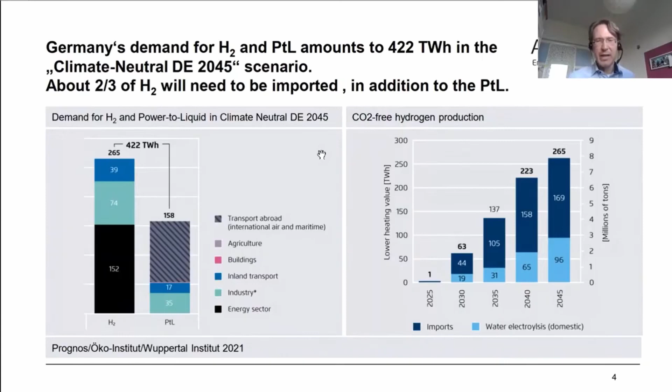For example, low temperature heat is actually needed also in industry, but in particular in large volumes in buildings, individual buildings. We think that's a bad idea to talk about molecules for those applications. Same thing for passenger cars or light-duty vehicles.

Now if we want to move forward with a hydrogen economy, a decarbonized one, we should focus on those parts that are least controversial and uncontroversial. So let's start with industry. It is uncontroversial and very much acknowledged that we need reaction agents and feedstock. And then there's some other stuff in transport, in the power sector, and in buildings.

Now, since industry has a particular challenge because in many respects it is under intense global competition, and we can see global competition gaining speed in Asia, in America, we need to position European industry in a way that it is actually able to compete in the race to net zero. Therefore, we have said we should really focus on the uncontroversial molecules needed in industry first. And that was our starting point to design what we call our no-regret hydrogen project.

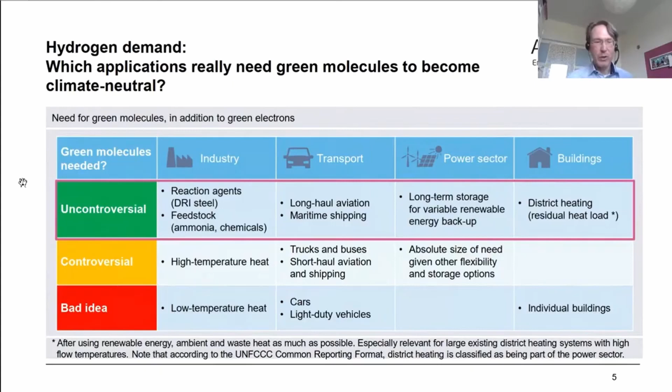I brought you some slides on this today. So we commissioned AFRY Management Consulting to study the underlying question: what's the most cost-effective way to deliver hydrogen to the centers of industrial demand in Europe? So this is the focus. What AFRY did was map industrial demand from steel, ammonia, refineries, and chemical plants, then map supply with the best future levelized cost of clean hydrogen. I'm going to talk a bit more on that.

And then they model least cost delivery systems, which includes storage sites, salt caverns basically—this is all in there. And the result is what we call no-regret pipeline corridors as early opportunities. That is key to understanding this contribution from our side. We don't deliver the big picture for the future of the hydrogen system all across Europe. The question is, where do we start?

Where is the agreement for an early start? And you can find the publication, a data appendix, a slide deck in the webinar if you click on the slides later here.

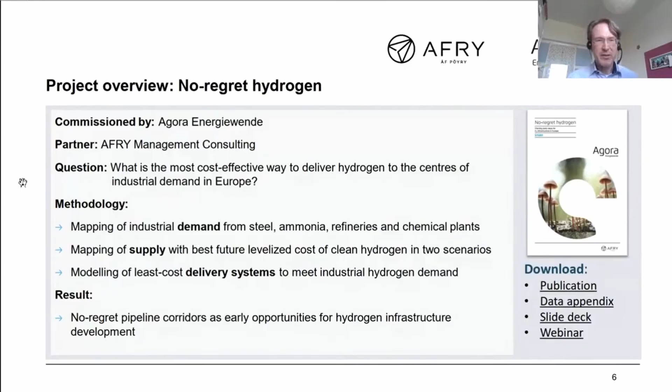There's a phase-in of steel and direct reduced iron steel production, and a phase-out of refineries. That's a strong assumption, I have to admit, but overall the picture is the same. There's a difference in demand by orders of magnitude: below 1 terawatt hour a year, let's say rather in the south, and up to 10 to 30 terawatt hours per year in the north especially—and it's not a surprise—this area between Germany, Belgium, Netherlands, France shows 24 and 27 terawatt hours. Large clusters of chemical installations and steel plants, and of course also some clusters in Eastern Europe and along the Mediterranean.

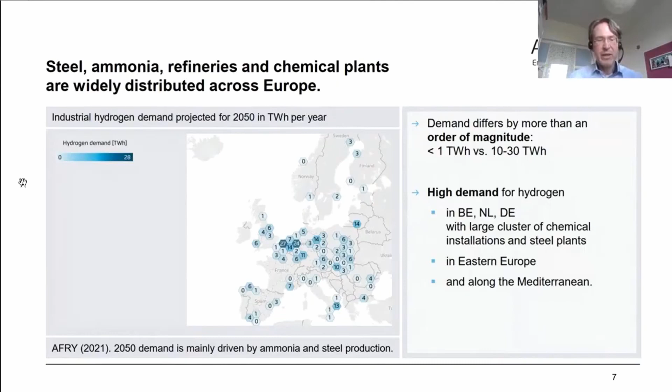Now, this is our starting point. Where is the uncontroversial, no regret industrial demand? And then we mapped potential supply.

We had 2 scenarios in our study. One we call blue-green: renewable hydrogen and hydrogen based on fossil fuels with carbon capture, what we call SMR-CCS. That's only admitted in the Netherlands, Norway, and the UK. Then we have another, fast green scenario. There's no SMR-CCS in there, and there's a very aggressive cost reduction in electrolyzer cost. We think that can actually be defended on the grounds that if the EU succeeds with its very ambitious target of 40 gigawatts of electrolyzer deployment within Europe by 2030, and even more around Europe, then it's okay to make this aggressive cost reduction assumption in the fast green scenario.

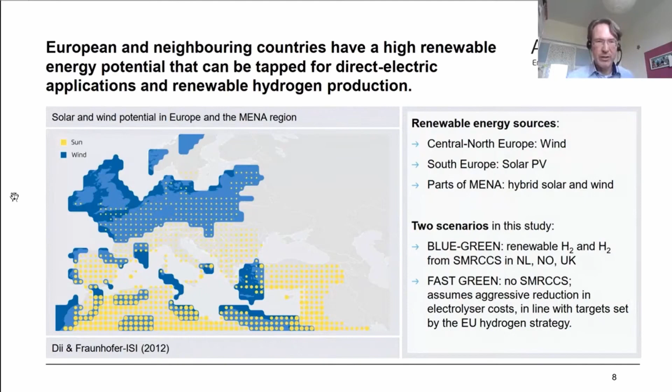However, there is a certain time during which blue hydrogen can contribute to decarbonization and remains a viable investment. The question, of course, is how long it's viable. If you can anticipate that costs for green hydrogen are coming down, do you want to invest today or in the next few years, anticipating stronger and increasing competition from green hydrogen? This is a very important question for anybody doing investments into this, because it may shorten the investment window and the window of opportunity for fossil-based hydrogen with carbon capture.

The key point here is that we will need ambitious policy to drive down the cost of renewable hydrogen, because any kind of cost reduction will not come by itself. What we've learned from solar photovoltaics is that there's a big contribution from just deploying PV and then learning by doing. If we expect countries to deploy electrolyzers, we can also anticipate costs coming down through scaling and learning, but this really needs an incentive to deploy electrolyzers in the first place. That's the entire discussion about how we incentivize green hydrogen, which comes at a cost premium today, so there's a cost gap to be filled and overcome.

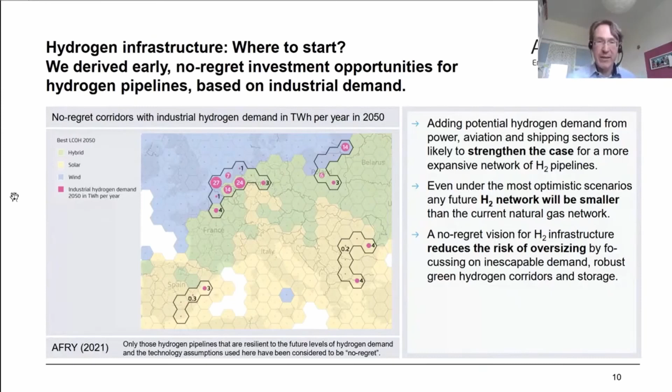And we should be sure that we don't oversize our hydrogen infrastructure based on misleading assumptions, because we should try to electrify first where it's possible. And then when we touch the limits, then we need molecules. And that's what we need to plan for with our infrastructure.

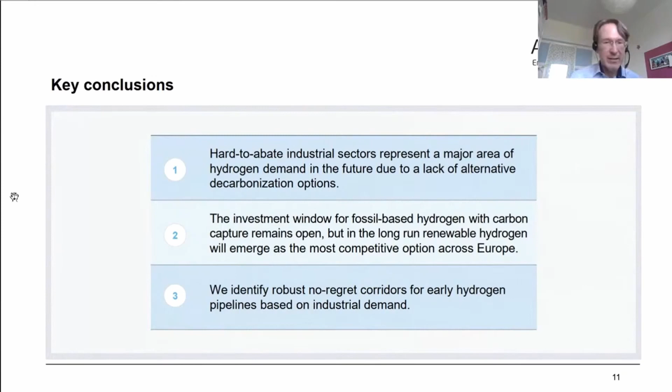So in a nutshell, what some people call hard-to-abate industrial applications and sectors represent a major area of hydrogen demand in the future, because they don't have much alternative or no alternative at all. And there we see an investment window for fossil-based hydrogen with carbon capture. But in the long run, renewable hydrogen will be more cost competitive. And based on this, we have identified our robust no-regret corridors as the starting point for early investment opportunities.

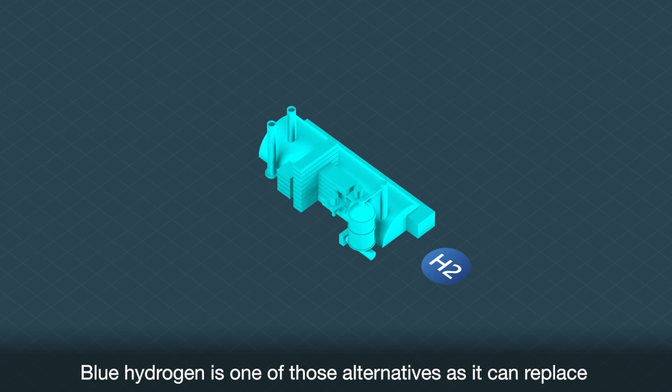Blue hydrogen is one of those alternatives, as it can replace the direct use of carbon-emitting fuels such as coal, oil or natural gas. It is a reliable energy to kickstart decarbonisation, as it is competitively priced for a low-carbon fuel and is continuously available in the large volumes required to support industrial needs. With a production capacity of up to 2,700 megawatts, the H2Morrow project aims to supply blue hydrogen to Germany and the Netherlands starting in 2027.

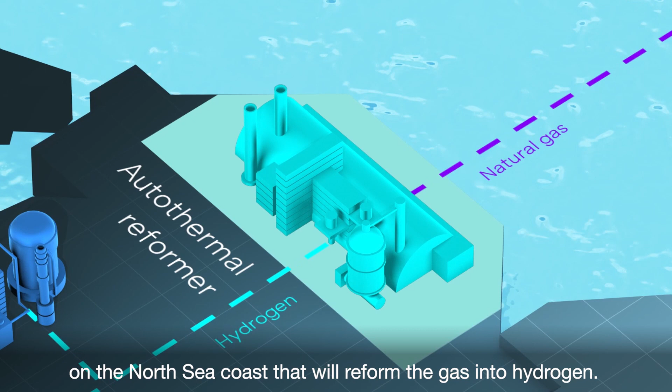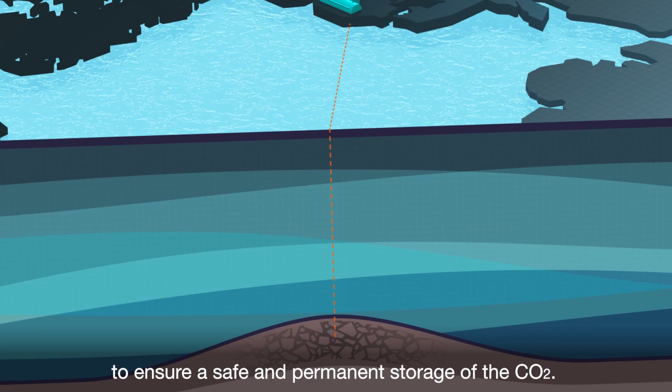For this to happen, natural gas from Norway will be transported via existing pipelines to a hydrogen production site on the North Sea coast that will reform the gas into hydrogen. The carbon footprint of the process will be reduced by 95%, as the CO2 from the reformer will be captured and transported to an offshore reservoir in the North Sea, where it will be stored a few thousand meters below the seabed. This type of storage technology has been in operation for over 20 years, and deposits are closely monitored to ensure safe and permanent storage of the CO2.

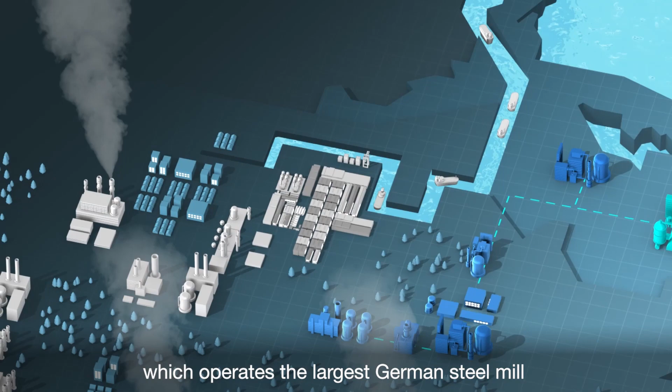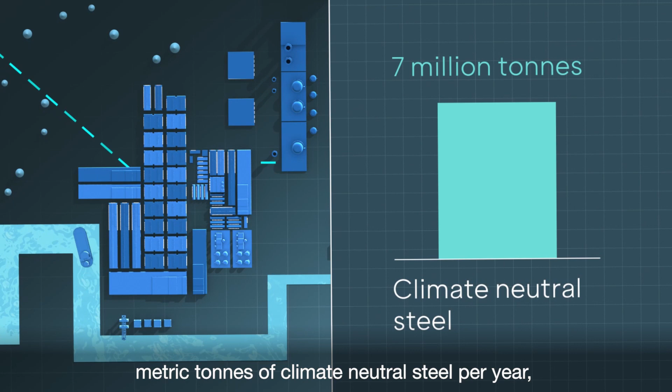From the production site, hydrogen will primarily be distributed via repurposed gas pipelines to industrial partners. The biggest partner is ThyssenKrupp Steel Europe, which operates the largest German steel mill from a site at Duisburg. The project is designed to deliver enough hydrogen to the steel mill to produce up to 7 million metric tons of climate-neutral steel per year, reducing CO2 emissions by up to 11 million tons at the plant, and helping reach the company's climate targets.

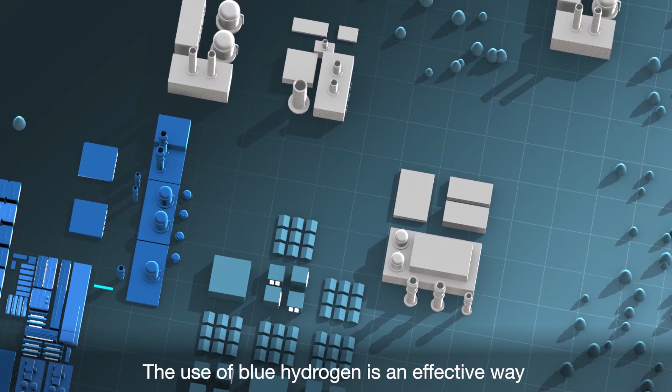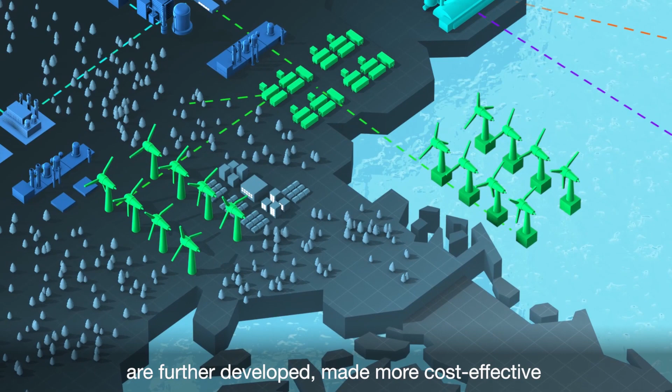The use of blue hydrogen is an effective way to establish hydrogen transport and distribution networks and transition to a clean hydrogen economy. The capturing of CO2 will accelerate the decarbonisation of the industrial sector, whilst technologies for green hydrogen, produced using renewable energy sources, are further developed, made more cost-effective and able to scale to the levels required by heavy industries. The success of the H2Morrow initiative is dependent on effective partnerships with local companies and on appropriate European and national policies and regulatory frameworks, which provide the basis for further investment. This cross-sector collaboration can radically transform centuries-old industries to make them fit for a carbon-neutral economy.

Thank you very much. Very interesting. We will come back to you shortly after the next two presentations for a short discussion round. Next up now is Torstein Melhus, who is Head of Business Development on Hydrogen and Ammonia at Agder Energi. He has more than 20 years of experience from industry, both as site manager, business development manager, chairman, and board member in several companies. Torstein, you will talk about the potential for hydrogen production in southern Norway and the export possibilities to Germany. Welcome, Torstein.

Thank you. Green hydrogen from Norway, I'll talk a bit about that. Equinor is focusing on blue hydrogen and green hydrogen, but I hope I could leave some kind of picture that Norway also represents a large opportunity for export of green hydrogen to Europe. This is Agder Energi in a short picture: about 14 billion in turnover, about 900 employees, 22,000 kilometers of grid, and 49 power stations in the rivers. We have dams, grid, and end customers. And our DNA is electrons, but we think our DNA would also be suitable to produce molecules from our hydropower.

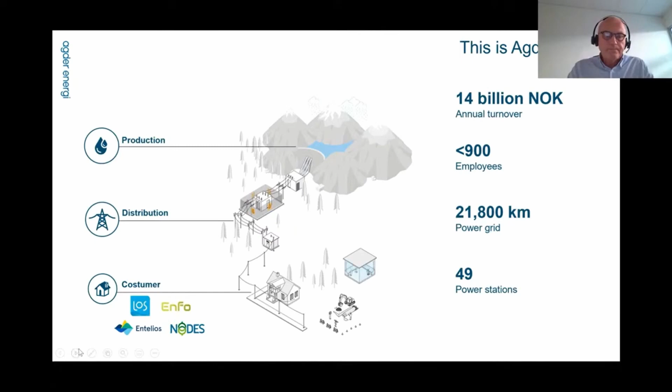Agder Energi is located on the south coast of Norway, closest to Europe of our regions. We have a surplus of renewable power in the region, hydropower. We have a strong grid, closeness to Europe, and we have good harbor facilities. So we have some prerequisites that should favor us for production, and it's not in any way talking down other areas of Norway. And we have available low-cost renewable hydropower.

That's a cost enabler for producing hydrogen. And we could utilize that to produce molecules, as said. And critical here and important is that the hydropower is available 8,760 hours a year. The best wind estimates are approximately 4,000 hours, meaning that we could double the amount of kilos delivered by installed megawatts or effect. We think this is a very important issue here.

We have access to the power grid, high available capacity. We have long-term PPAs at competitive price levels for the power. We have available areas for production facilities nearby harbors, and we have a short distance to Germany and Europe. And we are working on a possible scaling plan to establish a 120 megawatt facility in 2025, currently working on the feasibility studies, and increase that in steps toward a gigawatt in 2030, meaning it would be a substantial production and supply unit.

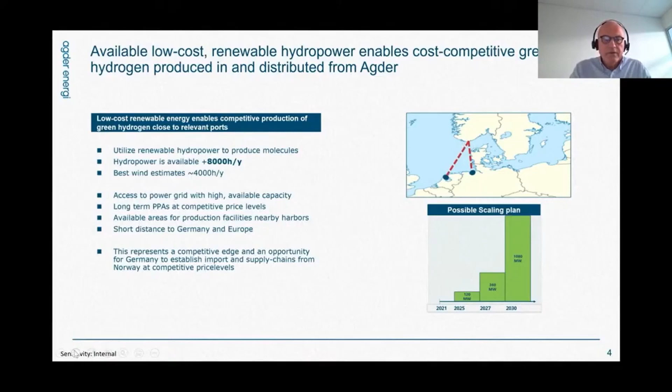We have to transport the hydrogen to Europe, and as the former slide showed, it's a close distance. Equinor is working on pipelines from the west coast for blue hydrogen. There's still no availability of pipelines for green hydrogen from our region. Probably there will be in the future, but in the short term, we see that we have to transform the hydrogen to liquid ammonia for transport and available shipping routes to Europe. This is similar to what they are doing in Australia, Chile, Africa, other continents; liquid ammonia is a commodity. There are available ships to transport it.

And another issue with transforming the hydrogen to ammonia is that ammonia is a bet as ship fuel in traditional combustion engines, both two-stroke and four-stroke. And engine producers are now working to bring forward machinery, propulsion machinery, and utility gensets for ammonia. We are working very closely with different engine producers, and we think this is a prosperous and enormous market when you have also solved the security issues with ammonia. And then also liquid ammonia for storage and transportation.

Transforming the hydrogen to ammonia, storing it on shore at the harbor, getting it on a ship, and sending it to Europe, we think is today the cheapest and most available way to transport it. The obstacle is that it needs to be cracked from ammonia in port or at the end customer, which takes local electricity, which needs to be green electricity, and it's not a good solution to use local electricity. But we think anyway it's the best.

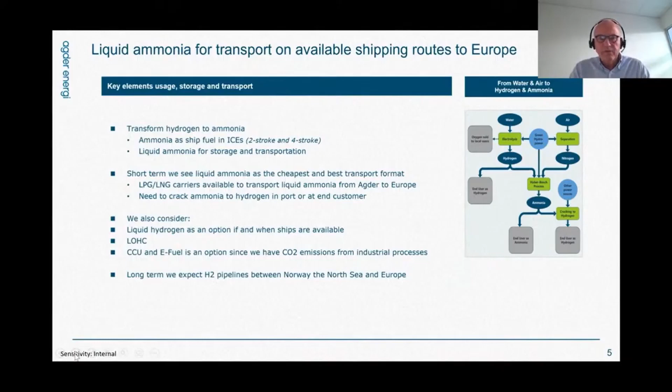But liquid hydrogen is an option when ships are available. Currently, there's only one ship. We hope that liquid hydrogen ships will come forward. We also have been looking into LOHC, which I think is Hydrogenious coming after me now. That is definitely a genius solution, which we are looking into. And also we could have carbon capture and produce e-fuel. We have emissions from industrial processes. And long term, we expect H2 pipelines between Norway, the North Sea and Europe, and that will dramatically reduce the cost of transport.

So, key takeaways. The most important issue, I think, is that we are able to produce 8,000 hours a year, at least, which will maximize the yearly tons. We have fairly priced long-term PPAs. We are able to perform rapid deployment with hydropower in place. We don't have to build anything. The grid is there, the hydropower is there, the locations are there. We are good to go. There are available ships and sailing routes for liquid ammonia with short distances to Germany.

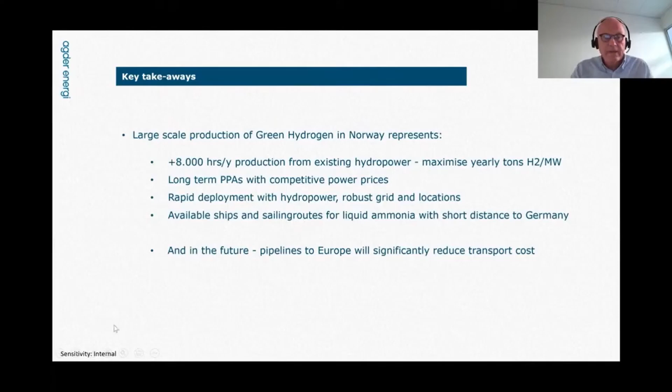So, just to close this, we want to start production of green hydrogen and ammonia in Norway from hydropower. There are available ships to ship it to Germany. And what we hope is that the reception and incoming logistics in European harbors are available so that when the ships come, Europe and Germany are prepared to receive the ammonia, crack it, store it, and distribute it further into Germany. I think the easy part here is the production side. What I have discovered in meetings with German companies is that the incoming logistics are still not available.

So what we'd like to do is to participate in cross-border pilot projects to speed up supplies of green hydrogen from Norway to Germany. And we see that Norway represents an opportunity for Germany to establish import lines for green hydrogen. As said, you don't have to wait for anything to be built. The power is in place, the grid is in place, it's ready to go. So I hope we will get into more and good cooperation with German actors and harbors and parties.

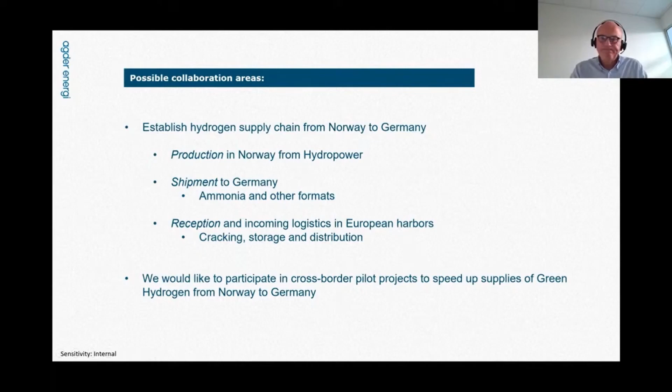Thanks a lot, Torstein. And we move on to our third speaker in this session. That is provided by Ms. Siying Huang, who is Senior Business Development Manager at Hydrogenious LOHC Technologies. Ms. Huang joined the company in 2018 and is focusing on project development in the European and Asian markets. And she'll tell us more about their solution for transport of hydrogen, both at scale and over long distances.

So Ms. Huang, are you there? Yes, hello. So let me try to share my screen now. So thank you for waiting, and thank you for having me here today.

My name is Siying Huang. I'm working at Hydrogenious LOHC Technologies. So as you can already read from the name of the company, we are really focused on the commercialization and product development of the LOHC technologies. And you can see an overview about our company. The company was established in 2013, so about 8 years ago, by our CEO and his 3 professors at the University Erlangen-Nuremberg. And by today, we have more than 100 employees already, and have filed more than 40 patent families worldwide in the field of LOHC technologies.

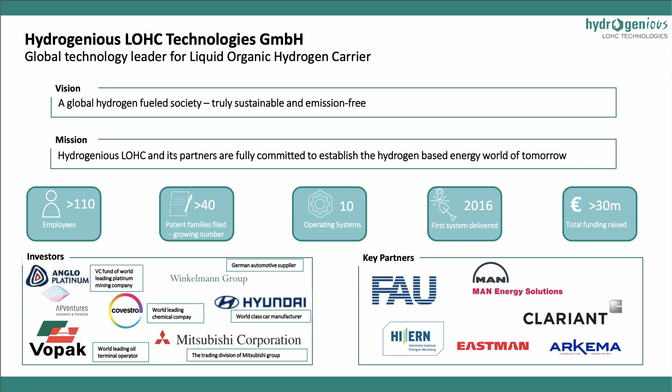And we have managed to demonstrate and to prove that the LOHC technology works in the last few years by implementing about 10 small-scale systems. And today we are working on the large-scale, industrial-scale systems. So I will come to that later. And on the bottom of the slide, on the left side, you can see that we have different shareholders to support us to promote the technology. And we have on the right side different technology partners who are developing together with us different components and making technology improvements for the LOHC applications.

Here you can see how the LOHC technology works. The technology itself is based on 2 chemical processes. The first one is called hydrogenation. So once the hydrogen is produced, whether coming out from a steam reformer or from electrolysis, it can be put into our storage unit, in which the hydrogenation process takes place. After the process, we combine the hydrogen molecules with the molecules of the carrier. And what we get as product is the loaded LOHC carrier. And the loaded carriers can be transported by truck, by train, by ships to different hydrogen off-takers.

And at the off-taker side, we have our second system, where the dehydrogenation process takes place. After this process, we separate the hydrogen molecules from the molecules of the carrier, and the hydrogen can be used again for different industrial applications, for steel production, for refineries, for example. And of course, it can be used in the mobility segment. The hydrogen can be fed into large fueling stations, for example, for heavy-duty vehicles.

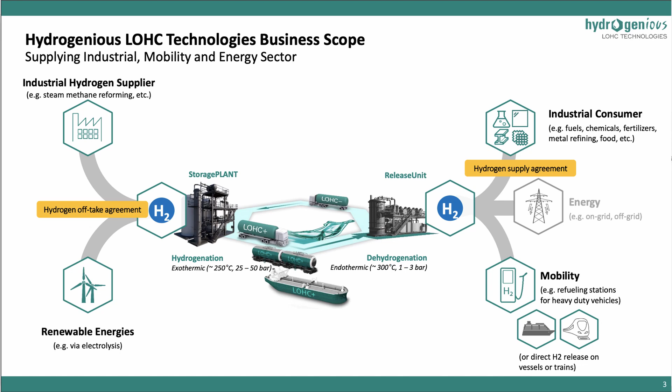So today I would like to introduce one of the projects that we are now developing together with our partners Verbund, Siemens, and Bayern Oil. The project is called Blue Danube. The basic idea is to produce green hydrogen in Eastern Europe, in Romania, for example, using wind power and solar power, and then store the hydrogen in the LOHC carrier, and then transport the LOHC carrier along the river Danube to different off-takers along the river, like off-takers in Austria or in Bayern, like refineries, large fueling stations, steel producers, etc.

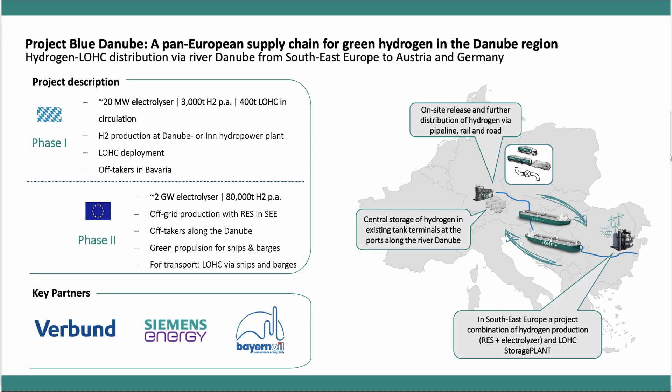And for this project, Blue Danube, the consulting company Roland Berger has also done a feasibility study and compared different transport technologies. And in the graphics on the left and right side, you can see that in regards to the conditioning and the conversion and reconversion processes, the LOHC technology has easier implementation and better cost efficiency compared with other technologies. And in terms of the transportation from harbor to harbor, using ship transportation based on existing inland shipping infrastructure, the LOHC technology also has large advantages compared with railway, truck or pipeline.

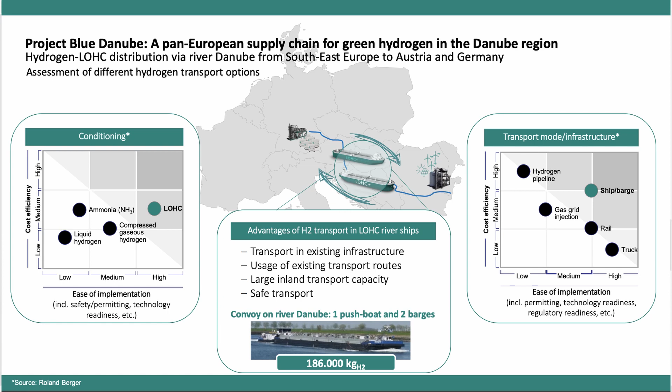In the meanwhile, we are also working on other projects. These are all, let's say, located in different regions, from Germany to the Netherlands, from Spain to Germany, and even from Middle East to Europe. And our idea is really to bring green hydrogen from locations where the green hydrogen can be produced at very low cost, to locations where the demand for green hydrogen is very high, the production cost is very high, and also the production capacity is limited.

And of course, Norway as a neighbor country for us is also a very interesting market that we are looking into. At the moment, we are also involved in one project in Norway. It's called HyFuel. In this project, the idea is to produce green hydrogen on the west coast of Norway, and then store it into our LOHC material. And the LOHC material will be used for the maritime industry.

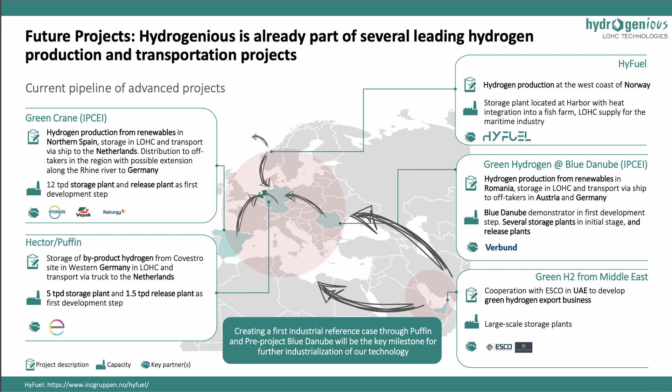And for the long term, of course, we can also imagine to produce green hydrogen in Norway, store the green hydrogen in the LOHC material, and then bring the LOHC material to different off-takers in other countries, like Germany or the Netherlands, and so on. So that's our target picture, and we really look forward to further discussions with interesting parties, and together to set up a global hydrogen infrastructure based on LOHC technologies.

Thank you. Thank you, Ms. Huang, for this very nice introduction to your company and to your solutions. Now we have time for a few questions, and I see some questions have come in the chat bar. So, Hanne-Marit. Yes, maybe the first question for Randi Mette from Equinor. What is the intended duration of the blue hydrogen supply for ThyssenKrupp's plant? And are there specific plans to switch to green hydrogen later?

If you look at the hydrogen ambition level, it's very high. So that's why we need all decarbonization tools and colors of hydrogen to meet these ambitions. For instance, in the EU hydrogen strategy, it would account for 13 to 40% of the final energy mix in 2050. And if all of that has to come from green hydrogen, 80% of all the power today has to be developed on wind alone to feed the electrolyzers. So the barrier is that we have to have all production technology through a transition phase. You could have some green already now, but you don't have the volume needed. So you need a transition period with the blue.